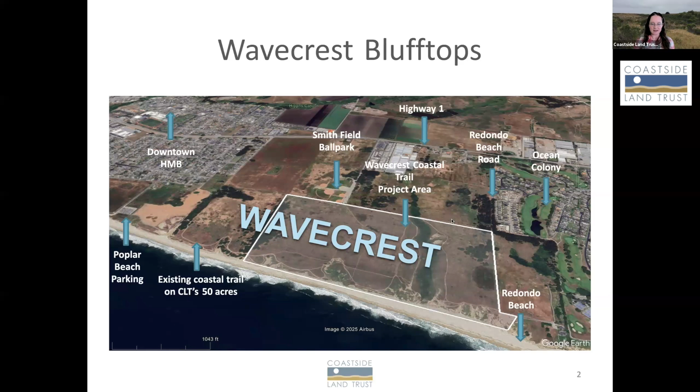I get the question, why this project? There's already access at Wavecrest, and people are using it all the time. When I answer this question, I go back to CLT's mission, because the two big components of this project, providing environmentally protective and safe coastal access for recreation and restoring the bluff tops, are fundamental to our mission of preserving, protecting, and enhancing open space on the Coastside.

And then there's the beauty of Wavecrest. It's an incredible, very special natural place. People come from far and wide to enjoy the walking and biking, getting to the beach, watching wildlife, and looking at wildflowers—now's a great time to go see them. So that's a big component of this project, enabling people to enjoy the Wavecrest beauty.

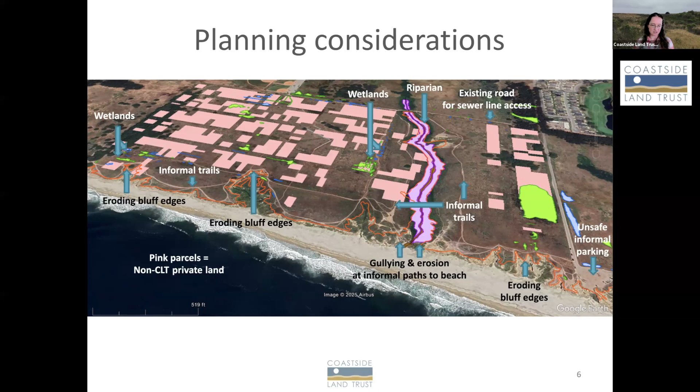I want to point out a few changes in recent years. During the review by the Half Moon Bay Planning Commission in 2023, the amount of parking was reduced to better match the loss of parking with the closure of the dirt area at Redondo Beach Road. It used to have three parking areas, but the middle parking area is no longer part of the project, so now it's just the two parking areas.

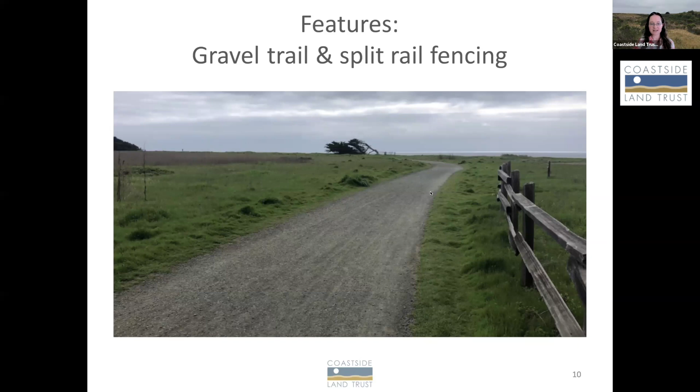We're not using pressure treated wood. They're mostly going to be hand construction, and again, at the bottom they'll be set back from the beach, so they're not going to be in the tide zone.

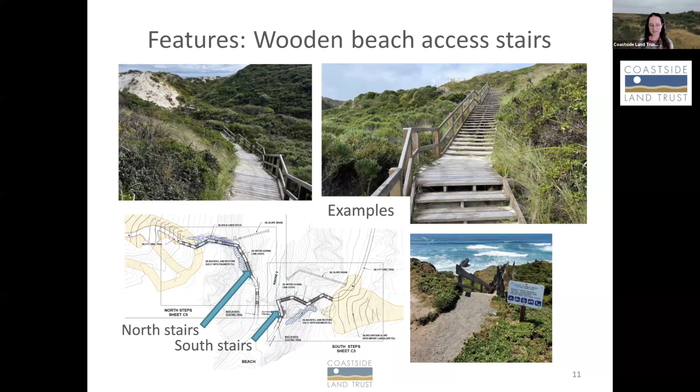In terms of the parking lots, there'll be two of them, as I mentioned. They'll have 25 standard spots plus 2 ADA compliant spaces near the restroom on the eastern parking lot. Again, this is Redondo Beach Road, with east to the top of the screen. They'll have the same compacted gravel as the trail, split rail fencing around them, and wheel stops to mark the parking spots.

We did have to remove the horse trailer parking from the western lot. The dimensions of the parking lot changed because they had to be redone due to stormwater retention requirements, and it was no longer feasible to have horse trailer parking — basically, you could get the horse trailers in, but there was no way to get them back out.

I want to point out that the parking lots, once open, will be posted with signage for parking lot hours, which will be dawn to dusk, and there will be no overnight parking allowed. But there will also not be any gates on the parking lots.

The Coastal Commission has made it clear to us that we would not be allowed to restrict vehicle access to those new parking lots, because it's replacing the informal parking at the dirt lot at the end of Redondo Beach Road. Essentially, we'd never be able to lock the gates. So we're not going to build gates there.

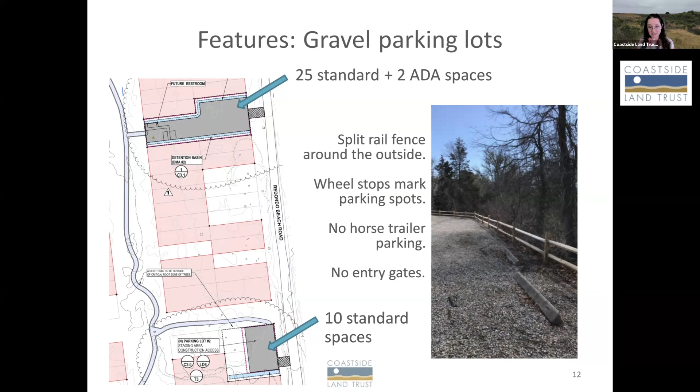However, I've been working with the neighbors near Redondo Beach Road and city staff on options for addressing issues like illegal dumping. There's also been fireworks at the end of the road. It may be possible once the new parking lots are installed to gate off Redondo Beach Road west of the western parking area, since there will no longer be parking at the end of the road. So that would be a potential solution, TBD, but we're working with folks to try to address those problems.

There's no electricity to the site, no power to the site, but we will have solar panels on the restroom to power the lights in the restroom stalls, as well as externally. Those lights we plan to have motion sensor controlled at night. And then the bathrooms will be locked at night.

There will be a professional cleaning service to maintain and stock the restrooms, and also the pet waste stations. There will be a drinking fountain on the side of the restroom, and I think the one we will have will have a bottle filling station.

I cannot promise that this will eliminate illegal dumping, which is quite the issue at the end of the road currently. But at least these enclosures will not be an invitation to dump stuff like a dumpster is, frankly. We will also have a few bike racks at each of the parking lots, as well as at the tops of the stairs locations once the stairs are installed.

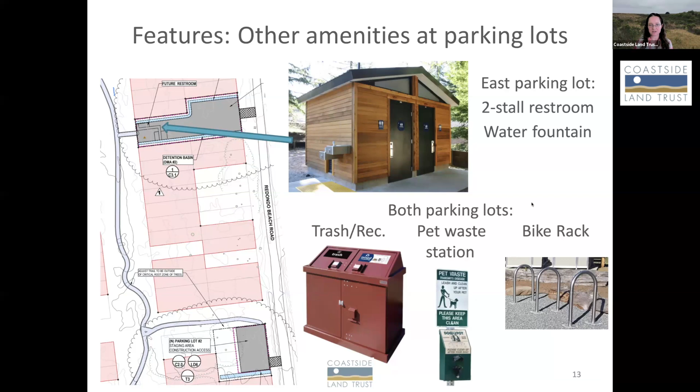I also wanted to point out that we are going to replace the signage on the existing 50 acres bird trail segment of the coastal trail when we install the signs for this new trail project.

Primarily, the wayfinding signage will be on posts and they will be visible, but we didn't want them to be intrusive on the landscape out there. There will be parking signage at the locations of the two parking lots, so folks can tell where those entrances are from Redondo Beach Road.

And then, of course, there'll be regulatory signage about rules, staying on the trail, and hazards. A lot of those, especially within the trail alignment, will be on post signs, similar to the wayfinding signs.

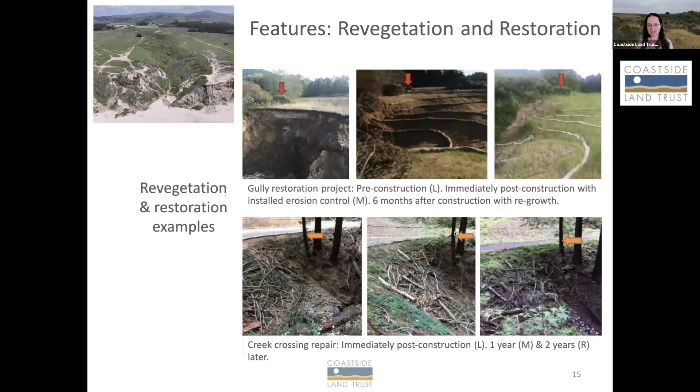Construction phases are divided up a bit because the construction of the gravel trail and parking areas, as well as the restoration work, all involve grading to cut the trail, for instance. There's a lot of movement of excavated material, engineered fill, gravel, and compaction of the trail as it's being built. There's also compaction in the areas being restored, where the gullies are being restored and at the location of the stairs. It involves heavy equipment, and this type of ground-disturbing work has to be completed in dry conditions.

In contrast, the construction of the wooden stairs is done by hand - it's mostly carpentry. Because it doesn't involve groundwork, we're not limited to working on the stairs construction only in dry conditions. It's also a different type of work entirely.

The utilities and restrooms are a mix. The installation of the water main and sewer line connections does involve trenching with some heavy equipment, though not nearly to the scale of what's involved for the trails, parking, and restoration work. But then you have the actual restroom installation, which is basically like home construction.

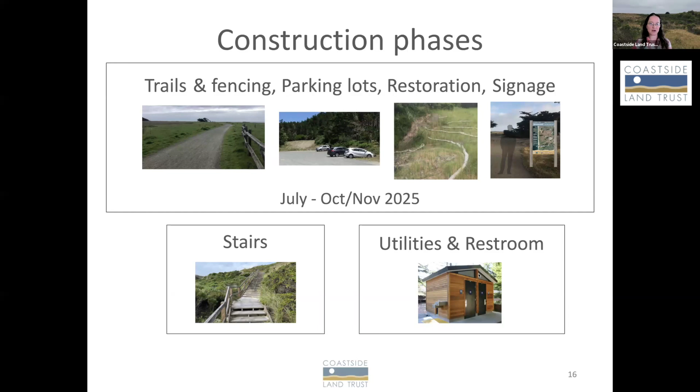Both the stairs and the restroom really have to wait until the trail, parking, and restoration work have been completed. The gully restoration needs to occur before we can install the stairs, and the parking lot needs to be there where the restroom's going to go. But it's actually going to be used as the construction staging site where we'll have equipment and materials throughout the summer while we're doing the construction of the trails, parking, restoration, etc. So that's the breakdown of the different phases of construction.

There will be different types of dump trucks for moving materials, and there'll even be a bottom drop dump truck for distributing the gravel - they'll drive along the path of where the trail is going to be, spreading the gravel, which is a very efficient way to get the gravel out there.

So you can see the kinds of what it'll look like during construction. They're going to start off by clearing the path of the new trail, removing the vegetation, and then they'll take out about the top 4 inches in the path of the trail.

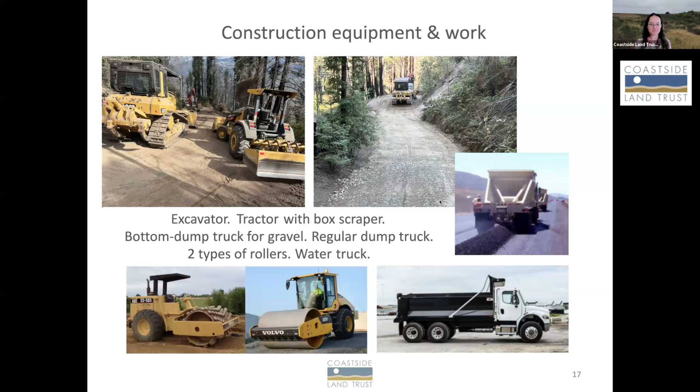Staging, where the equipment and materials will stay, will be primarily in the two future parking lots, although there will be some smaller staging areas along the trail path, fenced out and designated by fencing.

Because, as I told you, what's necessary for restoring the casual trails does involve big equipment, expect to see big equipment in the areas where we're doing restoration work and drainage repair. The gravel will be arriving in dump trucks along Redondo Beach Road, coming in through one of the two parking areas.

Before construction starts, the biologist for the project, from our consultant SWCA, will be doing pre-construction surveys for protected species and nesting birds. They'll identify and mark out areas where construction activities might need to be excluded. For instance, if there's an active nest, they'll mark a buffered boundary around that area that we have to stay out of until the nest fledges. That's just one example.

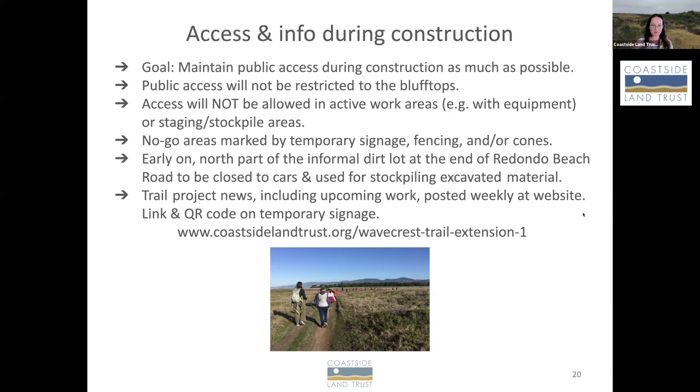I wanted to touch upon the other two phases of construction, the stairs and what's coming next for those stairs and the restroom. There's been significant erosion in recent years at the stairs locations, particularly on the south side, that requires additional design work now. It's pretty challenging to design the south stairs to meet building code, but also the 20-year longevity standard we're required to meet for our funders. So once we do that, there is some permitting we have to complete for the south stairs.

If we go ahead and build the stairs on the north side, we would preclude our ability to build the south stairs, because it would be great if we could just say, okay, while we're finishing up the south stair design, let's go ahead and build the north stairs. But we can't, because that would essentially mean we wouldn't be able to build the south stairs after. So there's a lot of timing and sequencing involved. We also had some changes in the availability of our funding, not the amount, but the timing of it.

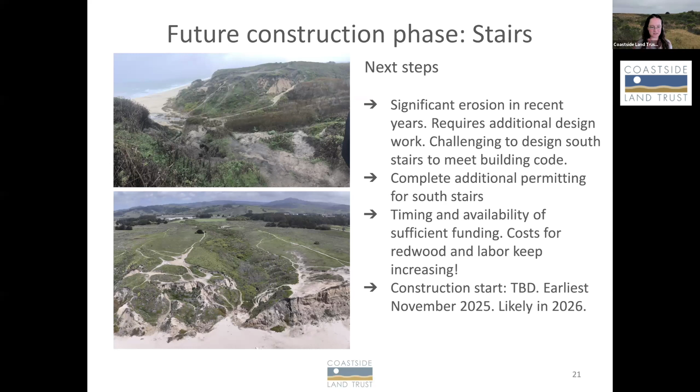And then the restroom, the future for this is more certain. We just need to get the permitting for the utilities and the restroom building done with the water district and the city. Then there's a 6-month lead time for delivery of the restroom, which is from the supplier, ROMTEC. So we're looking at construction starting with the utilities installation, and ideally we'd like to do that early 2026. It does also depend on site conditions, like we can't do it if it's too wet, and also permitting requirements.

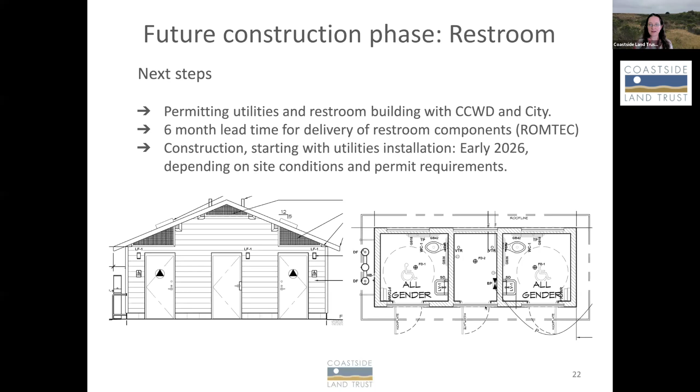Lastly, I want to point out and acknowledge our funding for this project. Without funding, this wouldn't have gone anywhere. The county really stepped up big to fund the planning work, and Post also contributed substantially to the funding of the planning work. I also want to note that Post was a huge help to CLT in funding the acquisition of that ravine area, which made this project possible as a key prior step.

Many generous individuals donated to the Ryan Popple and Rick Lohman Memorial Funds that were dedicated specifically to supporting development of this trail project, and we couldn't have done it without that funding and support. We're also very fortunate to have a large grant from the Coastal Conservancy for construction of the project, and a smaller amount of mitigation funding that came via the Coastal Commission for the beach access component. With that, I'd be happy to take questions.

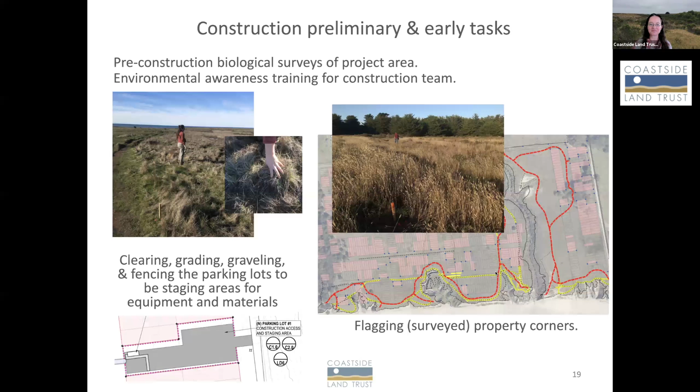Someone else was asking, can we still park at the baseball lots and access the trail? Will we be able to walk north? I realize I did a poor job of noting that the trail does connect—let's go back up, sorry for the scroll. I know it's not nice, but I want to point this out because I didn't do a good job of showing it, though I did say the trail connects.

You can see here it will follow the existing road that's out there. We did not continue it all the way down to Redondo Beach Road. There is this road here—I don't know if you can tell, but it actually goes onto the parcel to the east, which isn't our property. These are just casual trails basically, so we stopped there and that's about it.

Anyways, it will definitely connect to the Smith Field parking lot with a nice trail.

We'll keep the map up because someone else was asking, will there be a through trail access at the beach entrances? Walking around the ravine can often seem arduous. I think what they're talking about is beach access from the other beaches.

Well, if you go down the stairs here, you're literally going to go—I think a lot of people will probably do that. If they go down the beach access on the south side, they can just go straight up the beach access on the north side. Yeah, for sure, that's the plan.

Someone was asking about the classic problem of trash containers overflowing. What's our plan for that containment area?

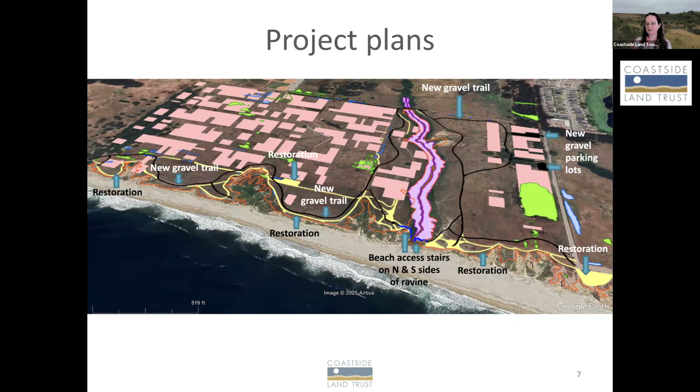Julie was asking will there be any more details in terms of our safety and security plan that we'll be talking about as we go to the public—plans to address people sleeping in their cars along the roads and the new parking lots, things like that.

That's exactly the same issues we're facing now. We're not going to be able to do anything additional—the sheriff will be the responsible enforcement party for this. As an organization we already work with the sheriff's office when there's illegal overnight parking, camping, encampments, etc. These things don't necessarily change, but we'll definitely continue to work with enforcement. Sometimes it's a combo with the city since it's on city property too, and we work with the city closely. So these are things we're already dealing with, and it will be the same situation for the parking in the project area.

Helen asks, is there any consideration for benches anywhere along the bluff? We didn't include benches, but that doesn't mean we couldn't. I think sometimes it depends on where the benches are—if they're not right along the trail, they can encourage people to go off trail. I like that idea, but I'm too busy right now trying to get the project to construction in less than a month. I appreciate the comment, and I will reinitiate it as an idea for locations along the trail, because I do think it's lovely to be able to sit on a bench and just zone out and enjoy the scenery.